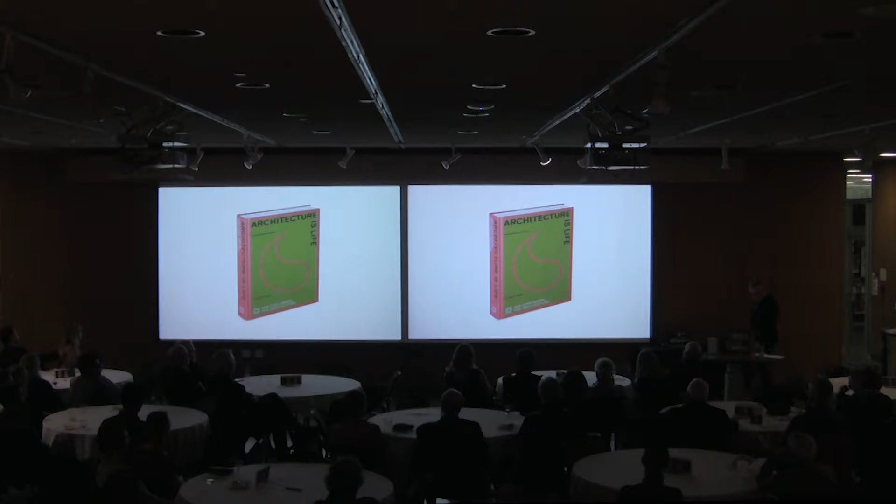His dedication to architecture is best exemplified not only in the projects they build and the architects they hire, but in the Aga Khan Award for Architecture, which has more to do with improving conditions of humanity than with heralding new architectural styles.

The award aims to identify architectural projects that successfully address the needs and aspirations of Islamic societies in the fields of contemporary design, social housing, community development, and improvement of the environment. So it recognizes in the award the contribution of the teams, the users, and the projects themselves.

I'll make one comment: when the Ismailis were in the process of being expelled from Uganda, they met amongst themselves, and with the Aga Khan and other leaders in the community. There was at the time a unanimity that wherever they would settle, they would build new spaces for gathering of the communities and for the practice of their faith in the countries that were welcoming them.

These new buildings were to be called Ismaili centers, and they had to reflect the Ismaili aspirations for the future rather than the tragedies of the past. These would be places where other communities would be received in a dignified manner and where common ground could be found between groups that sometimes badly misunderstand each other.

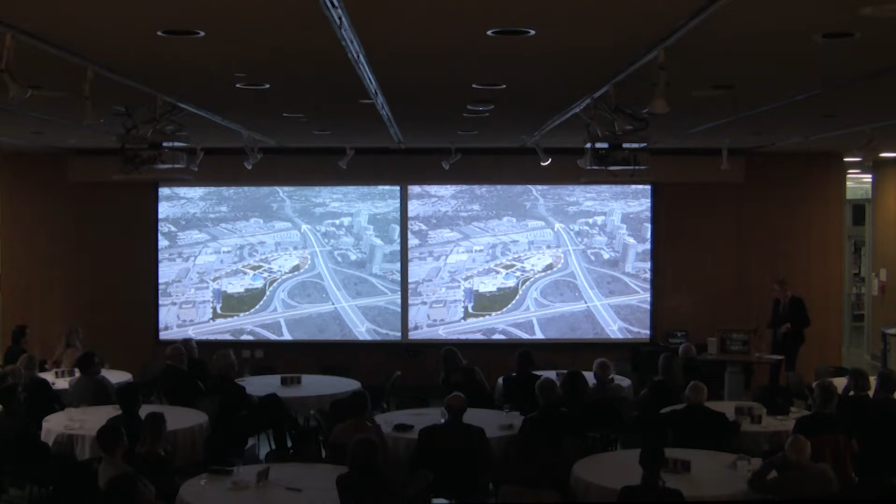Some more views of it. There was a competition actually in the year 2000, which is the very first time we met Charles Correa. The competition was for the first Ismaili Center. There's an Ismaili Center that Bruno Freschi had designed in Vancouver, and then there was a competition for the Ismaili Center in Toronto. Moriyama Teshima were asked to participate in that competition along with Charles Correa and Arcop, I think, at the time. And that was the very first time we met Charles.

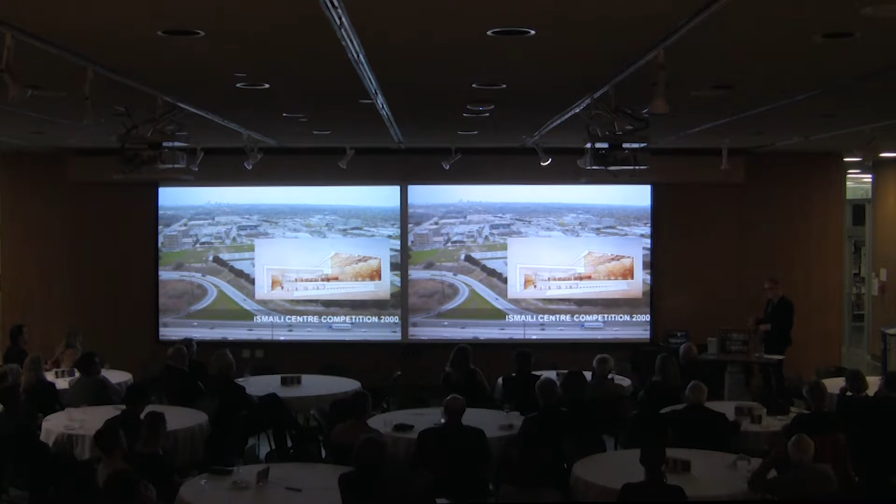We were just kind of like, my personal opinion, he's an incredible individual. But anyway, we didn't win that competition. Charles did, and probably kind of happy that he did. So it was a good experience.

The original competition was to be located here. This is the site before they started to excavate. Actually, this is a site in the year about 2004, just when we were being commissioned to work with Fumihiko Maki.

We were asked to work with Charles Correa, and we were asked to work with an unknown designer who was going to do the park, the Aga Khan Park. So the condition was that we would coordinate all three of the designers, plus the other designers that would be engaged in exhibitions and interior design and some of the other aspects of the project.

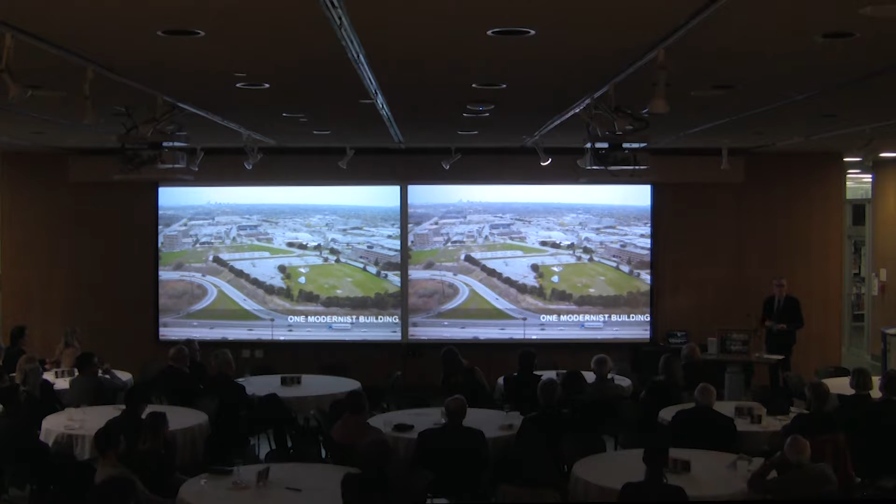So after a long discussion in the office, I mean, we'd worked with Fumihiko Maki on one project, and we just really enjoyed that experience both professionally and personally. Felt it was an extraordinary office, an incredible group of talented architects, very passionate about their work. And we thought it would be wonderful to try and find another circumstance where we could work together.

At the time, the Aga Khan Museum was scheduled to be located in London, but as we were finishing off the delegation building in Ottawa with Fumihiko Maki, the Aga Khan decided to move the Aga Khan Museum to Toronto, and that this would become a complex of both the Ismaili Center, the museum, and a park. And it would be kind of an oasis in the city, which was the original thinking process for the project.

There was one actually modernist building on the site, which was this building, the Bata Shoe Museum. Sorry, it's the Bata building. It was the Bata headquarters. And it was actually interesting because there was quite a pushback because this was a building of great significance. It was a company that had come to Canada and created this incredible recognition for their product. It was one of the early international global companies working around the world.

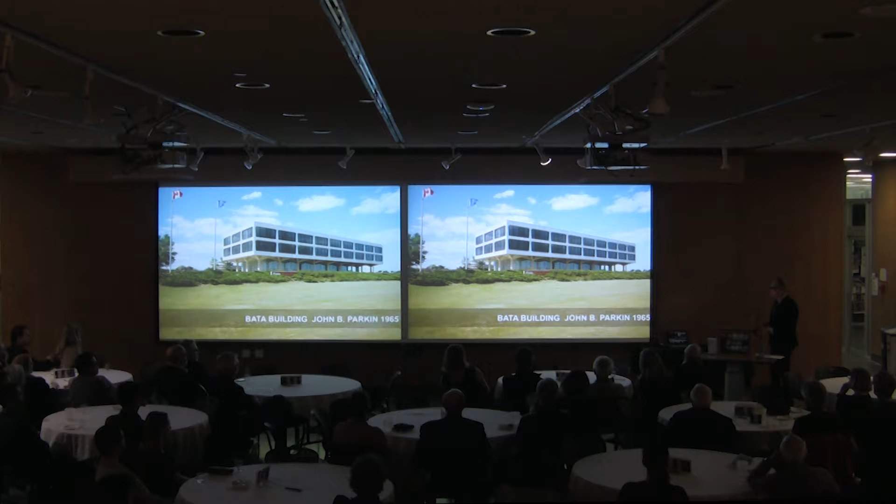Thomas Bata and Sonia Bata, I think, worked here pretty much every day. Sonia Bata, we'd worked with Sonia Bata on the Bata Shoe Museum, and Sonia Bata was an architect. She's a great storyteller too. She knew Corbu, she knew all these incredible people, and if you just wanted to sit and listen to her, she was really quite wonderful and generous in her reminiscence. So the Bata building was on the site.

There was actually a series of heritage studies undertaken, initially trying to find a place that the complex could work with the other buildings and the park. There was a large community meeting, and Sonia Bata came and spoke in favor of saying it was really time now for some new architecture—time for Charles Correa and Fumihiko Maki to put their projects here. In a way, that settled the issue, and the project moved on.

So this is the site. The first master plan was done by Maki, where they started to site the major buildings. In the original Ismaili Center competition, the Center was to be located elsewhere, but after they acquired the entire site, which sits on a high rise and steps down toward Eglinton Avenue, there's an incredible view going up the Don Valley Parkway. As you drive across the base, you see these buildings perched up on the rise of the site. So there was a desire to have the Ismaili Center located in this spot, where the prayer hall would become the most prominent piece of the site, and everything else in terms of size and scale would respect that particular form and shape.

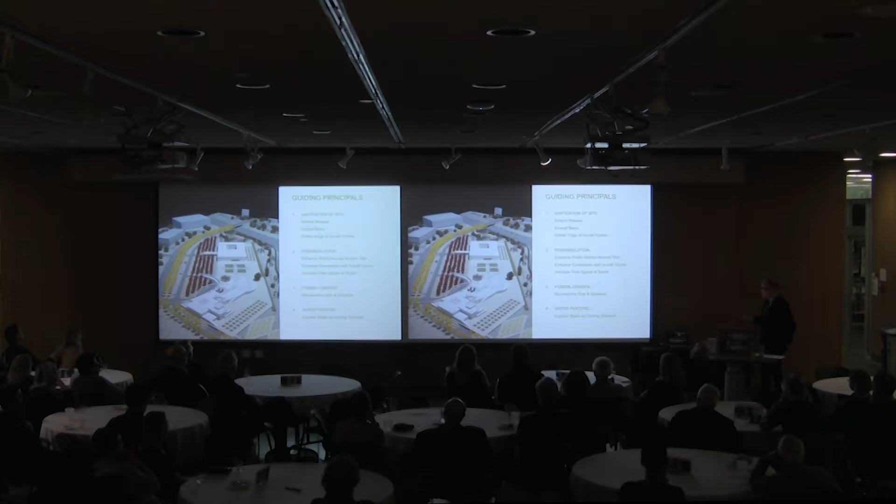There's a series of principles that were advanced at that time—this was around 2005. There was a unification of the site using landscape, extending a bosque. The site was also very noisy because of the Don Valley Parkway, with a lot of traffic along there. So there was a desire to soften the impact of noise through berms, providing a southern edge that could soften that impact. The landscaping along that southern edge became quite important, and there were studies on how best to mitigate the noise coming off the highway.

The planning department at the City of Toronto was also engaged at this point, and they were concerned that having buildings in the park ran counter to how they were thinking of an urban project, particularly in this part of the city where there are a lot of buildings set back from the street. So they were encouraging a way to create a strong edge along Wynford Drive, which became a landscape solution—an alley of trees that could create that kind of solid edge.

This was also before a competition was set up, simultaneous to this 2005 massing master plan, to select a landscape architect who could design this zone and the rest of the site—this zone being the most important linking element between the two buildings. So there was a question of how you enter the buildings. Both the museum and the Ismaili Center have these strong porte cocheres that reach out toward Wynford Drive, making a strong connection to the street.

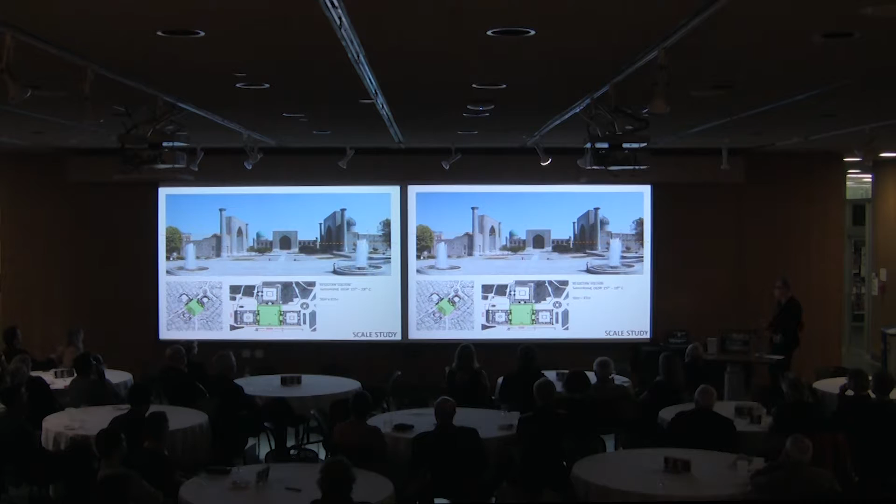And then there was the competition, and Vladimir Djurovic won the competition. Not many people knew Vladimir Djurovic. He had won an Aga Khan award, and that's the way the story is told. Somebody that was putting this together saw this and convinced the Aga Khan that he should also be selected to submit. He had a firm of about 15 in Broummana, which overlooks Beirut.

He's from Beirut. He left Beirut during the Civil War, trained as a landscape architect, came back to Beirut after the Syrians left, and a peace accord was reached, and he rebuilt his practice.

So he came with... I remember listening to his presentation, he just crushed the competition. He was so passionate about this project, and the drawings he did were just, I don't know, all the other competitors could not match. He was so obviously the person to select for the job.

It was incredible, because you just realize how, as designers and architects, you can actually do so much just with your beliefs and passions and the kind of skills, language, communication skills and drawing skills, given the right opportunities to win commissions like this.

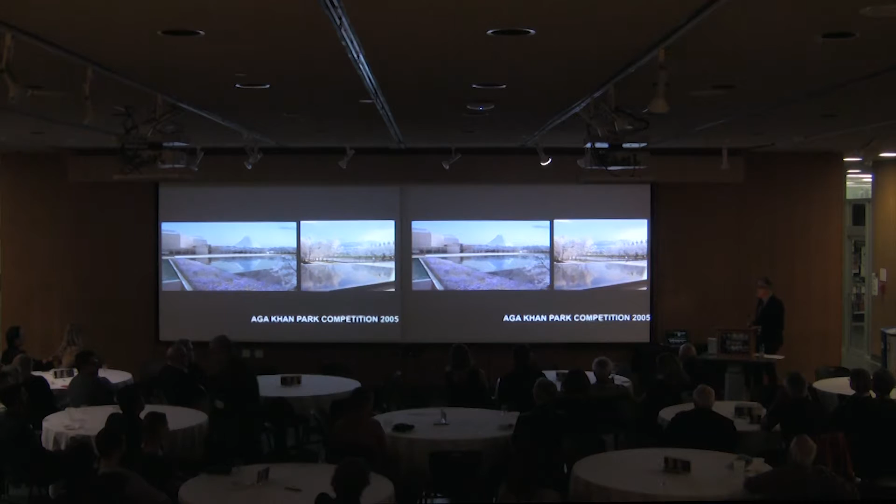So Vladimir Djurovic was appointed the landscape architect for the park, and because nobody really knew who he was, a group of us went to Beirut and we met his clients who couldn't say enough about him. He has quite a beautiful office overlooking the city, and he began this journey of designing the park.

So I'll just take you into the park a bit, because that's the sort of linking element. When he won the competition, the Aga Khan sent him on a world tour to look at Islamic gardens. So obviously these are some of the key ones.

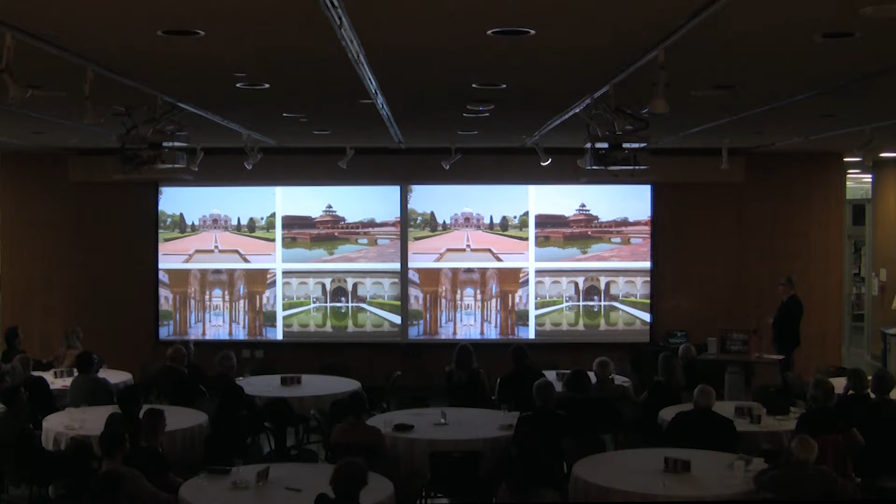Humayun's tomb, I think Alhambra, and I think it was like a 4-week tour looking at some of the major Islamic gardens throughout the world.

He actually looked very closely at the 4-part charbagh and came back, of course inspired by the landscape, the Persian paintings of landscape, depictions of landscape, but came back with a vision that would capture the essence of the Islamic garden and translate that into an expression reflecting its context and contemporary age. So he came back with not 4, but 5 components, water components.

So this is really the central part of the park. There's 5 ponds that link these elements and create this view corridor. There's a dense planting along the south edge to create a buffer, and then there's this sort of alley of trees along Wynford Drive. But this became the kind of center and heart of the complex.

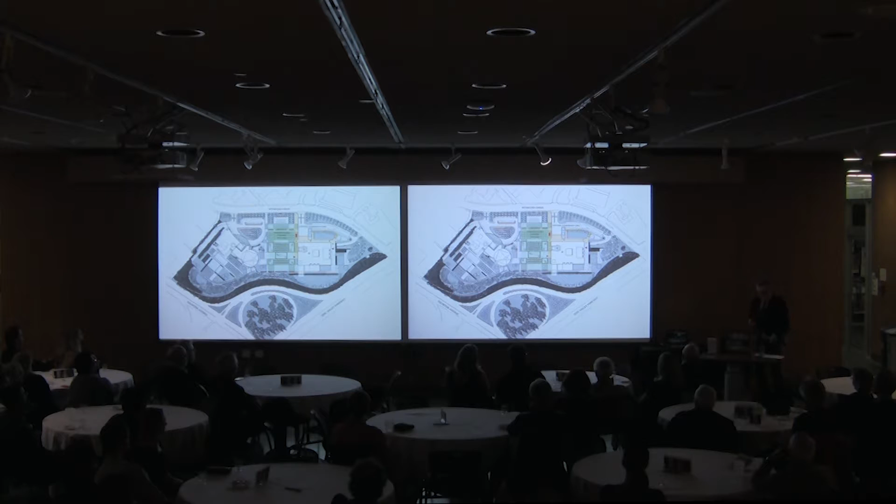That gesture alone started to shift the thinking around the museum, so that some of the initial planning in the museum started to change as a result of Vladimir's work on the garden. But there was a desire to create a stronger connection between the prayer hall and the museum. The prayer hall is aligned with Mecca, on that, I think it's southeast. And so these became the principal elements that helped organize the buildings. But the greatest impact was really on the museum.

Some images of the garden, the size, you can read those. Again, some images, but the idea was that there would be five pools that would reflect the 5 acts of Islam, and Vladimir also refers to the 5 senses: taste, touch, smell, and sound. The 5 acts of Islam, I guess there was the Hajj, giving alms, meditation, prayer - I forget the 5th one, but the 5 acts that reflect Islam.

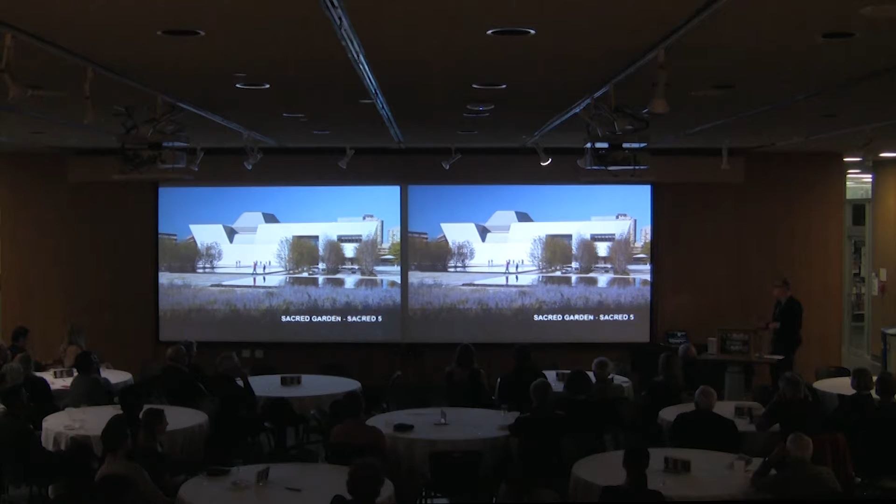And the gardens are actually quite beautiful. They're very powerful, and I think they create this sacred space. They create a great community space that's used quite extensively by the neighborhood. And the neighborhood is actually changing because a lot of the buildings there that used to be offices are now slowly being changed into residential, both apartments and condominiums. So this area is changing quite dramatically as a result of this complex.

So this will become what the Aga Khan wanted, a sort of gift to the community, for the community to use throughout the year. It's also a sort of artist palette. I think on the opening day, Imran Qureshi created a kind of canvas reflecting this opening event, and it was just let the rains wash it away once it was complete.

I'm going to talk a bit about the museum. The museum, I think, went through probably the most changes in the course of the design. But the hope of the museum was that it would contribute to a better understanding of all the peoples of Islam, the religious, ethnic, linguistic, and social diversity. The museum's educational and cultural mission is to provide visitors with an understanding of the artistic, intellectual, scientific, and religious heritage of the communities, both Muslim and non-Muslim.

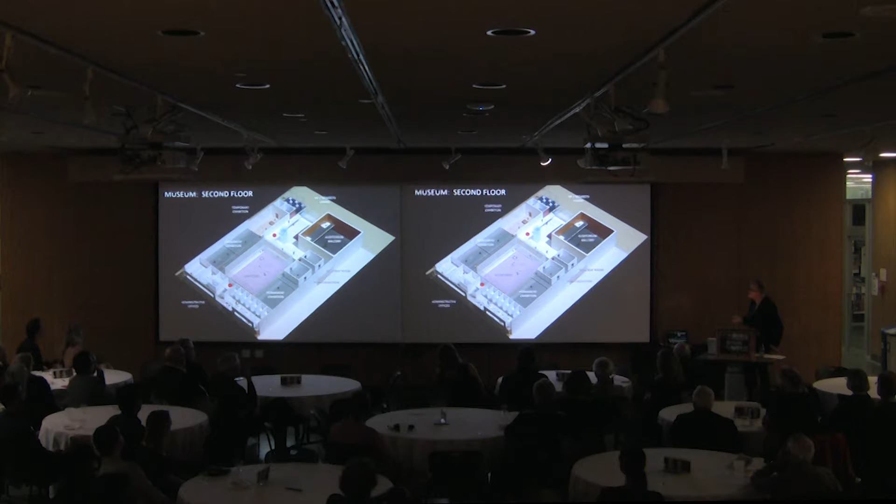The museum actually went through 2 iterations. The first iteration came out of the initial master plan, when we were working with the Aga Khan Foundation developing a program for the museum. You can see here some of the initial studies of the program. The program was very simple. It was organized around a courtyard, with exhibition spaces, permanent and temporary exhibitions. It was anchored by an auditorium, balcony, and those are the principal spaces, their administration.

There's a really strong entrance canopy that stretched out towards Wynford Drive. Through here, there was a main stair that went up to the second level. The second level had the temporary exhibitions facing south over Eglinton Avenue. Oh sorry, that's the main floor - that's the main floor. That's the second floor, sorry, I had them mixed up. Okay, that's the second floor, so you can see it's all exhibitions centered around the courtyard.

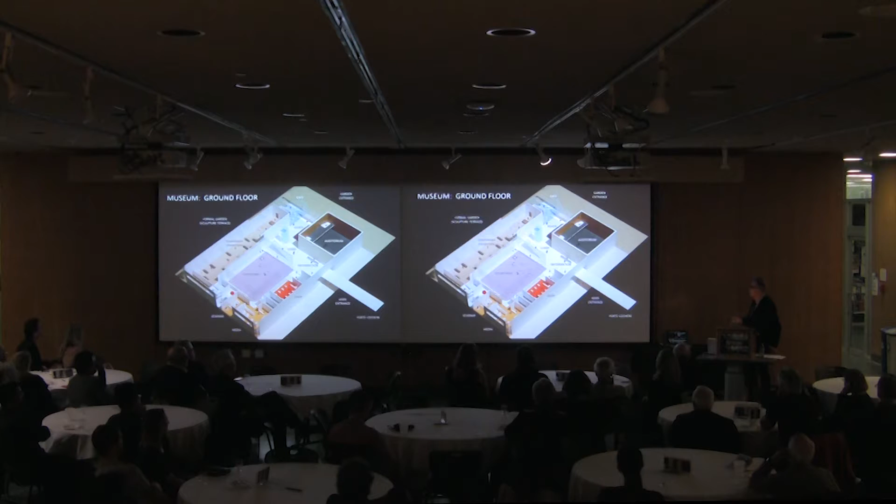And there was a strong connection through here to the gardens, which at the time we didn't really know what the gardens would be, other than that we'd recognize those gardens. Some of the original sketches from the museum, some initial studies - they had closed areas for the galleries and open areas for public offices or public use spaces. Some of the initial sketches show the connection from the courtyard through to the prayer hall of the Ismaili Center.

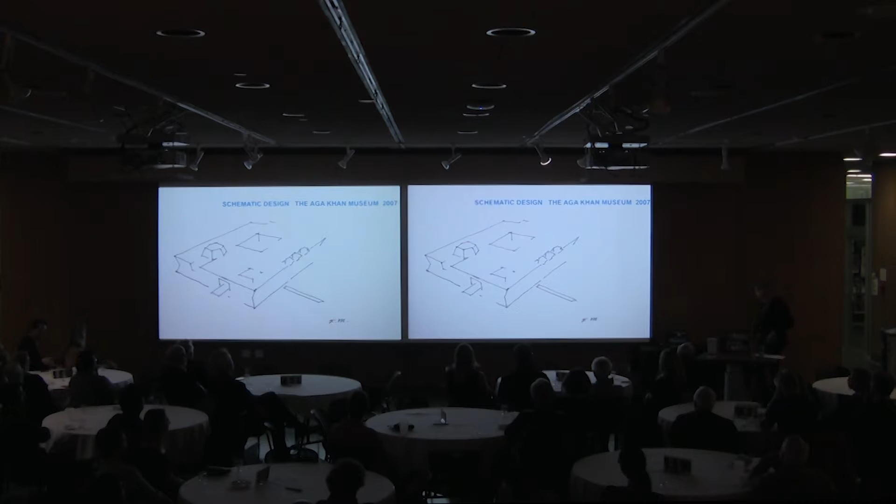I think then from 2005, when Vladimir Djurovic became involved and water started to emerge as a key part of the garden, there was also a time when His Highness and Fumihiko Maki talked about what the architectural aspirations of the museum would be. That's where the focus became on light—that the museum would be not only a source of light in terms of the programs and education it would offer to the public, but also a source of light in its architectural presence along with its operating mission. That became the direction that really influenced the final outcome of the form of the museum.

The museum actually changed quite dramatically. The actual organization stayed somewhat similar, but the museum shape changed with the walls canted in and canted out.

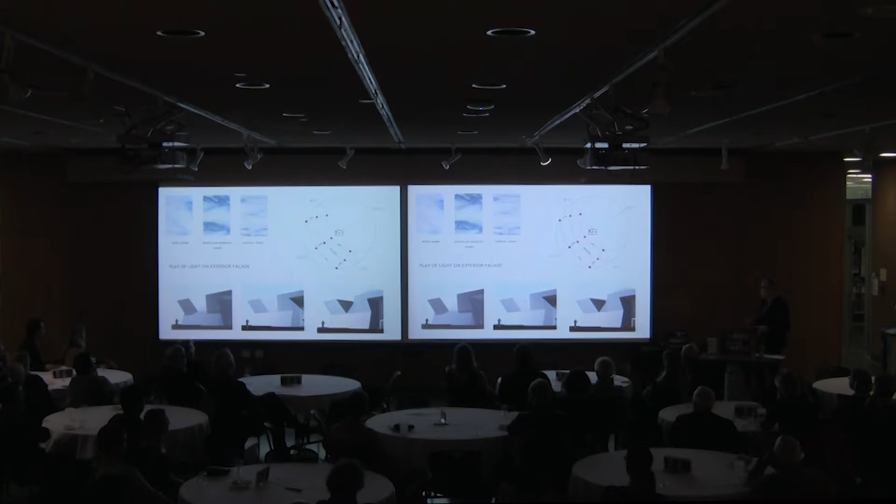There was a series of studies done around the central courtyard to find the best way forward. The idea was that the public circulation, immediately around the perimeter of the central courtyard, would be flooded with light—a dynamic light that would move around the public spaces throughout the course of the day and year.

So there's a series of studies. We looked at using a kind of laminated marble or onyx embedded into a curtain wall system. We also looked at operating louvers. There was either a combination that was extraordinarily expensive, making it unaffordable for the budget, or they were too complicated—more or less one-off solutions—and we couldn't get the warranties and risk aversion needed when putting these elements together.

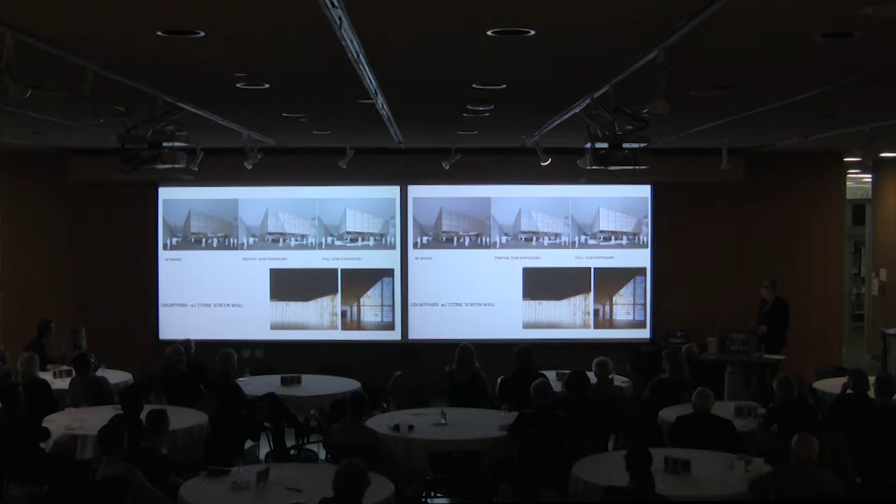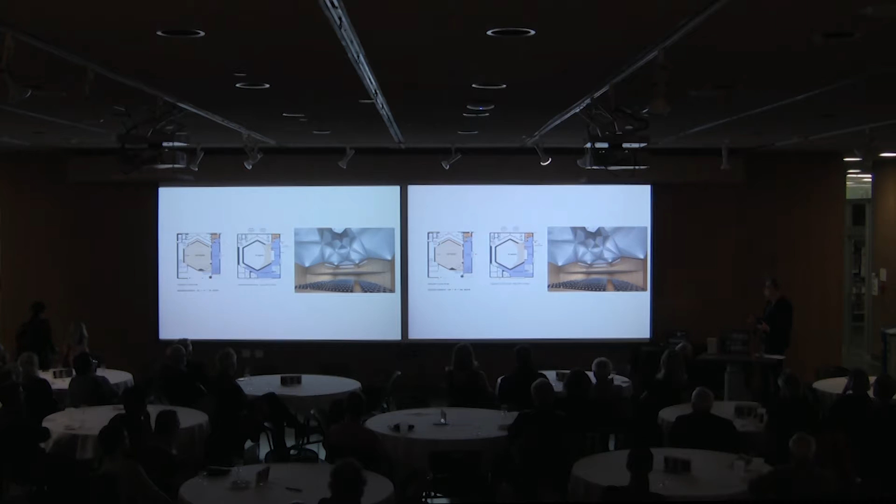These are some of the studies for the auditorium, which was to be a place for music, theater, lectures, symposia, and seminars. It was inspired by some of the Islamic shapes and forms that formed cupolas—in this case, the Zar Kashan in Iran. So there's a series of studies and models that were built of the theater.

There's a series of skylights that we looked at for the galleries that would allow light to filter in. The galleries themselves—the desire became to have galleries that were not so much black boxes, but places where you could actually look at artifacts in natural light. Black boxes can become dark spaces where you're just wandering around, going to where the light brings you. It's actually quite wonderful to look at the artifacts in natural light, which is how they were conceived and used.

But there was also an allowance by introducing a series of shoji screens along the base that could close off and allow the galleries to be darkened if needed for a particular light-sensitive exhibition, as well as the zinc skylights, which also had special screens designed to close off and filter light if required.

Again, I'll take you now to how the museum looks today. From that point in time, we worked very closely with our client group in developing what came out of the museum today. But the direction was really set in 2007, when the decision was made to go with this particular form.

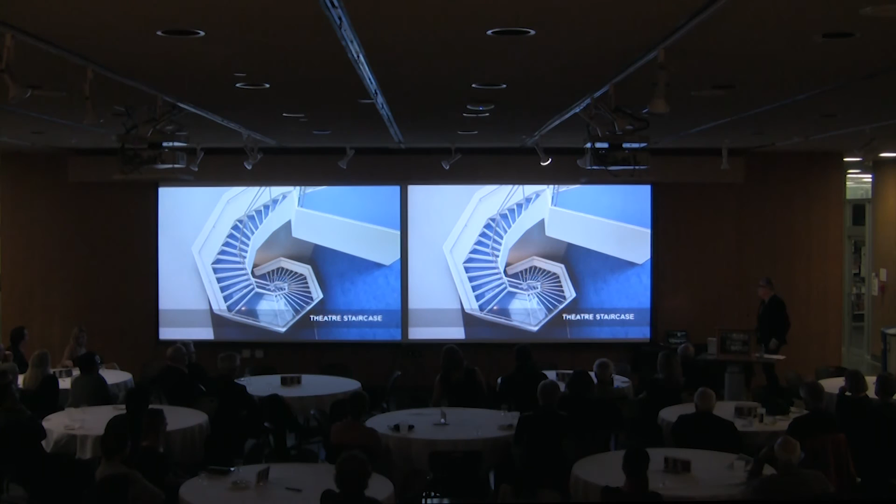The theater itself is a two-level volume. The staircase takes you up to the second level. It's finished primarily in teak, with sound baffles behind the teak—these mushrabiyya screens.

This is all hand-plastered, acoustic plaster. It actually took a long time to get right—it was a source of great frustration for the contractor as a side product, but it was a lot of work, and it's a very successful theater.

A detail of one of the zinc mushrabiyya screens, the pattern in the courtyard, and just a collage of details.

The program itself is very successful; the museum is very dynamic. If I think of the Gardiner Museum, which is across from the ROM, downtown at a nexus of major subway lines, the Aga Khan Museum—considered out of town by most Torontonians—has actually matched and exceeded the Gardiner.

The Gardiner is a ceramics museum, dealing with small objects, and many of the activities here deal with small objects too. I think the success of this museum really lies in its outreach—its public programs, lectures, music series, educational series. It's a very active outreach.

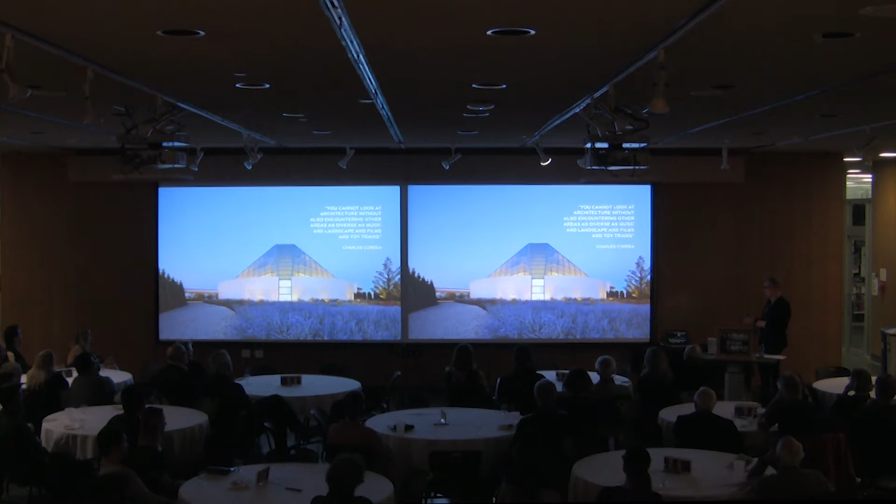So we had to develop this - we worked with Josef Gartner from Germany, and with Intuitive Engineering in designing a structural system that would allow for the Qibla axis here, aligning with Mecca. Here's the prayer hall under construction.

This was the section and mechanical operations of it. There were a couple of issues. One, they wanted to muffle the sound coming off the Don Valley Parkway. There was this notion of getting air into this big space without pushing it through so it didn't create a lot of noise, so it had to be displacement ventilation, low velocity, pushing it out into the space.

And then of course we had to clear the air out through this plenum between the two layers of glass, which was used to control glare as well as control letting light in and letting light out.

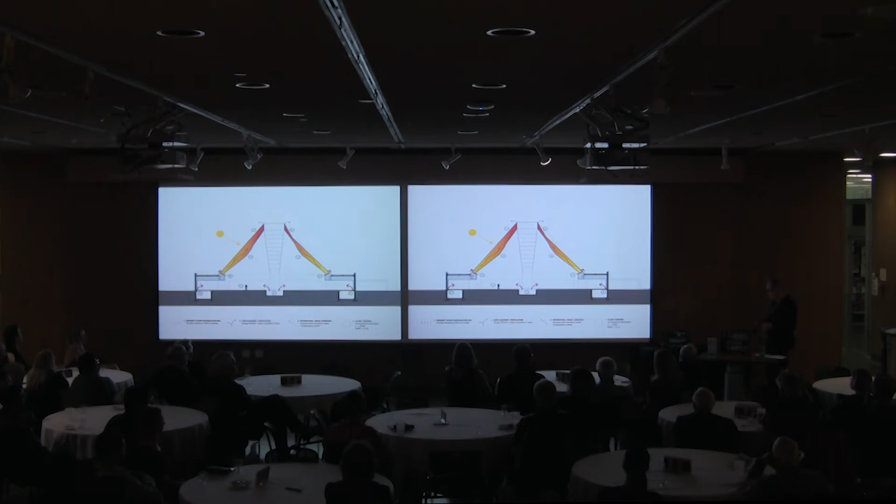So it was quite a bit of time working with Charles, working with Nondita Correa, his daughter, who teaches at MIT and came regularly to the site, regularly to the office for coordination meetings, as well as the engineers in sorting this out.

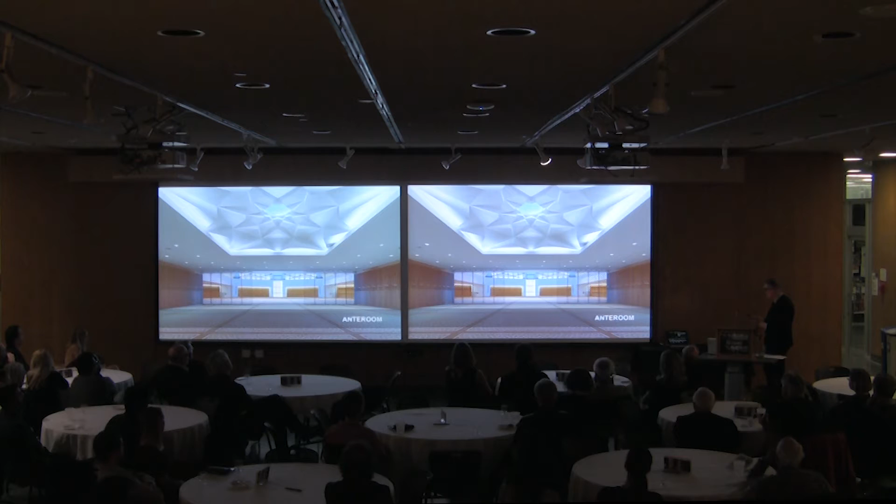These are some of the details. There's this anteroom that is a preview as you walk into the prayer hall. The perimeter is maple slats, and the calligraphy is millwork. The calligraphy millwork says Allah and is repeated as you move around in Arabic.

Some of the other spaces in the Ismaili Center - community spaces, administrative spaces - very successful. There's really only two of these Ismaili Centers in Canada, one in Vancouver and one in Toronto. It's a large community in Toronto, so this is used quite actively every day, not only for prayers, but for education, for schooling, for community use and administration.

Ariz Hazam, who is also an Ismaili, was a partner at 2x4 Design, who is now his own design company, did a lot of the interior design work. This is Ariz here.

Thought to put this picture in of Charles and Ray. They were actually discovering they both turned 80 that year when they were having this conversation. So they were asking each other what they got for their 80th birthdays. I think they both got photographs of themselves, I'm not sure.

This final shot is really the opening day of the park, of the complex - Kathleen Wynne, Premier, the Aga Khan, the opening.

This was a way to close this presentation, that the project symbolized integration of the spiritual, the artistic, and the natural worlds, in keeping with the holistic ideal, which is an intimate part of the Islamic tradition. At the same time, they express a profound commitment to intercultural engagement and international cooperation.